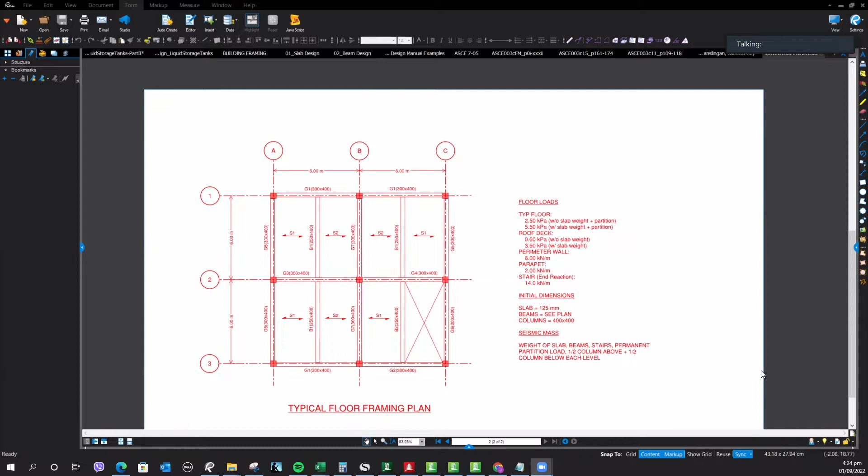Okay, so here we have the loads. I give you the load kani elevations, no? So 3.5 ang second floor, third floor 6.5, roof deck is 9.5. So ang footing is below 1 meter from the ground. Unya mao ni siya ang structure, no?

So floor plan. Kani siya class I expect a design of slab and beams lang sa for the September 15, kana sa ang pre-mid ninyo. I will announce it class when I will require this, but within September kaning design of slabs or design of beams akong i-require ninyo an Excel file, an Excel sheet.

So how will you do it? Okay, so naa diri tanan class ang typical floor weights. So 2.5 kilopascals kaning 5.5, please disregard this class kaning with slab weight kay ipa-compute na ko ninyo sa inyong Excel, no, ang slab weight, ang actual slab weight. So ayaw na ni ipil ang 5.5 hasta sa 3.6 roof deck, no? Perimeter wall parapet sa beam na ni siya, sa beam niya stairs.

Okay, so ang slab, this is the initial thickness, 125 millimeter. Depende kung mupasar sa design ninyo. So 125 millimeter start from there.

Kunya, beams, actually kaning mga dimension class, these are just assumptions, ha? Dili ni kung unsay na diri mausay inyong i-assume, ha? Kay it is possible nga kung abot na nig mga 8 meters, dili na nimo pasar kani nga member, or daghan kay kabilya. So that's why class,

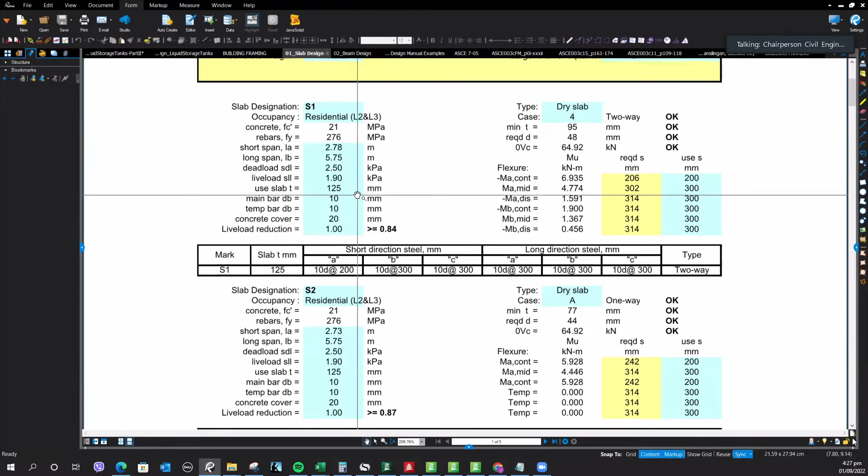Pero ako lang ipatanaw gihapon ninyo. Okay, so do you see my screen kaning slab? Kita ninyo class?

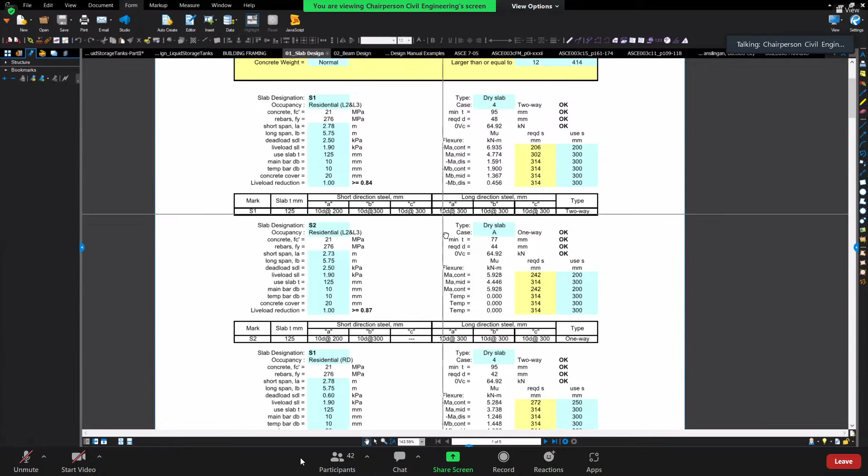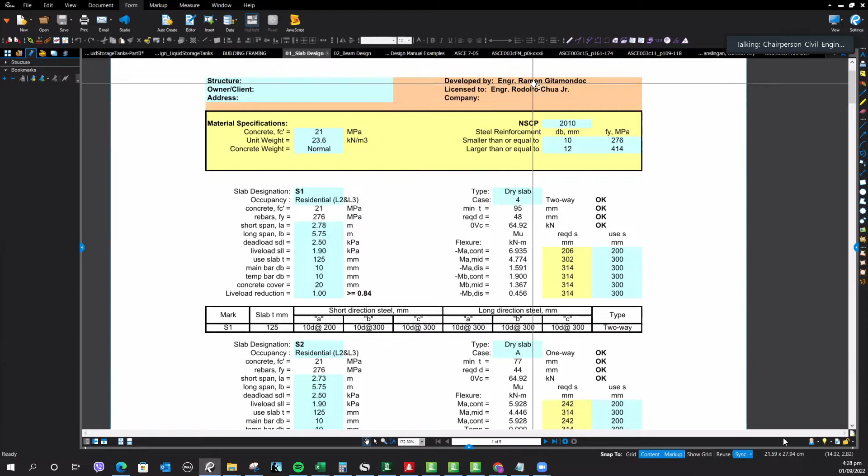Okay, slab. So this is the slab design. This is developed by engineer Gitamondoc, no? And then we have bought this from him.

Okay, and this is, it's just an Excel file class, no? We have done this in our undergrad sa una under Jerry Maratas, engineer Jerry Maratas, and it is also an Excel program pero dili in ani kanang unsa ni ka shortened, no? Medyo taas-taas to siya. It's okay class in whatever way you can do in Excel. It's okay with me. Pwede ninyo ipakita ang equation or unsa pa diha, basta it's an Excel file and it's user friendly ha, na masabtan.

I don't require you to follow this exactly kay naa naman yung mga programming embedded class, unya basin maglisod mo to make this ba. You can show how to compute the raw, or all the parameters ba in tabulated form. That's okay with me, no? For as long as you will arrive with the correct number, ha? So here class,

Excel file ni siya. So naa diri ang sa taas ang material specifications, ang FC prime, weight of concrete, unya unsa nga NSCP ang code gigamit, 2010, now is 2015, and then we also have the diameter is 10 and then 12 for the larger, is for sa kuan ni siya sa slab no 276, unya greater than 10 is for ang FY. Unya diri class ano man ni, na may two-way, no, nani two-way ug one-way.

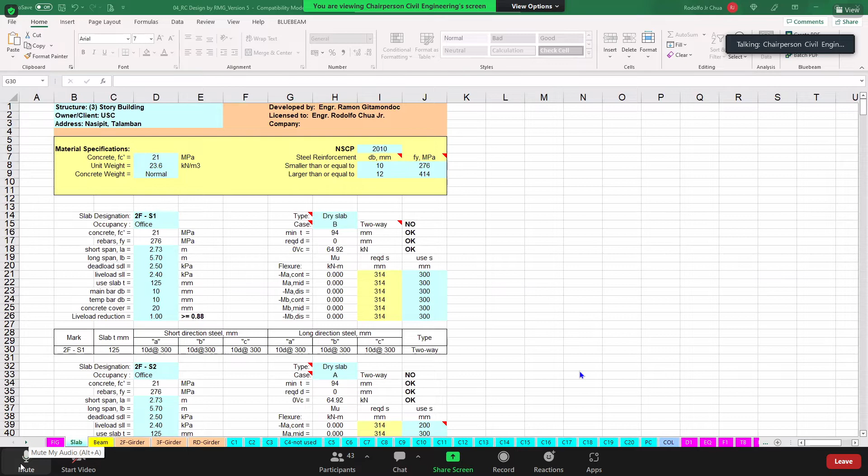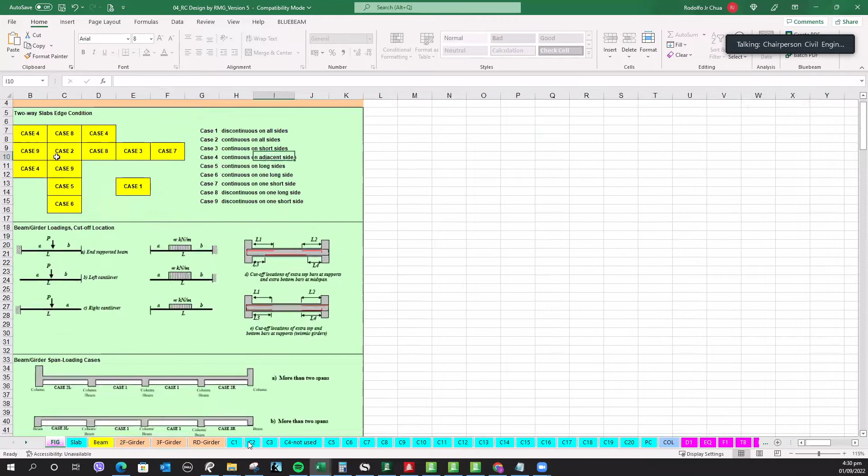So you see here, this is the figure class for the one-way and two-way slabs. This is so the user knows what case 4 means when they input case 4, referring to how the slab is continuous. So this can predict the long span, one end continuous, the other end discontinuous, and the short span, one end continuous, one end discontinuous. So which one applies to S1 if you look at the building frame - this is class for S1.

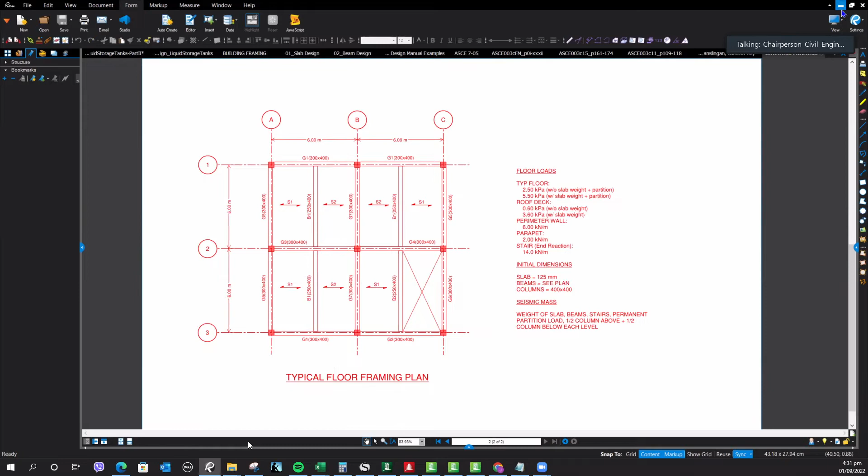Okay? In design, class, you have to look at the framing first - what members you can group together. That's why I put in the grouping for you earlier, so you don't have to think about it again.

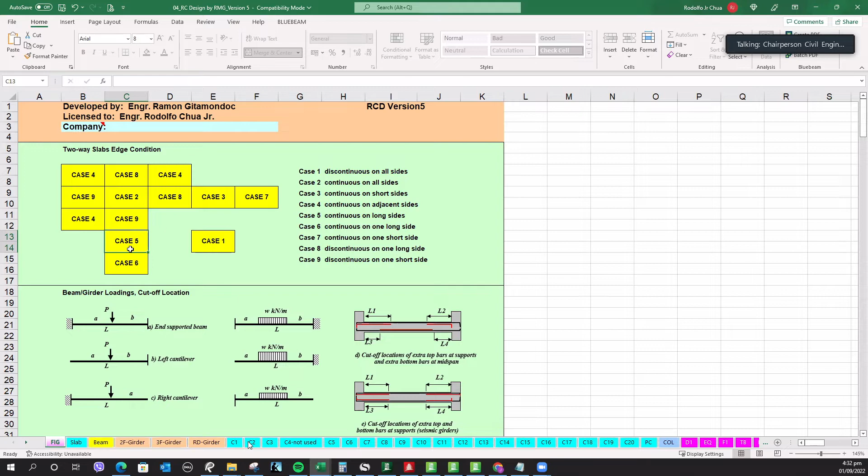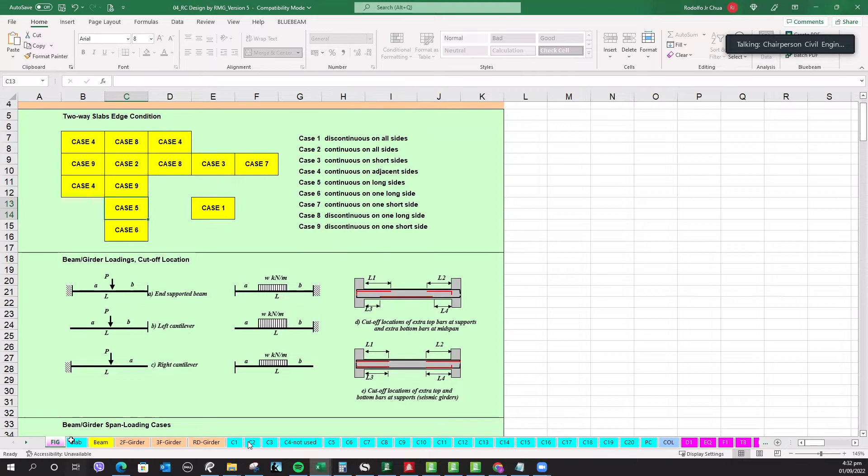And then for the one-way slab - it's here for the one-way slab. Okay, so all of these are two-way. Both S1 and S2 are two-way, so there's no one-way.

So here's the input for the short span - the clear span of the slab, minus the beam width. Dead load is 2.5, live load is 1.9, slab thickness 125, main bar diameter 10, temperature bar diameter 10, cover is 20. This live load reduction is in our NSCP, but conservatively we just assign 1 here.

And then you compute the moments for each long span and short span. So on the continuous side and discontinuous side, there are moments there. And then I'll go back to this - sorry, this is the 9 moments here.

I'll upload this, class. And then we have the minimum thickness, okay, required depth of the slab, okay. And then phi Vc, and then compute moments at each point - at mid-span, discontinuous side, continuous side. MA is for the short span length, MB is for the long span length. So the required spacing, of course, round down to hundreds, divisible by hundreds.

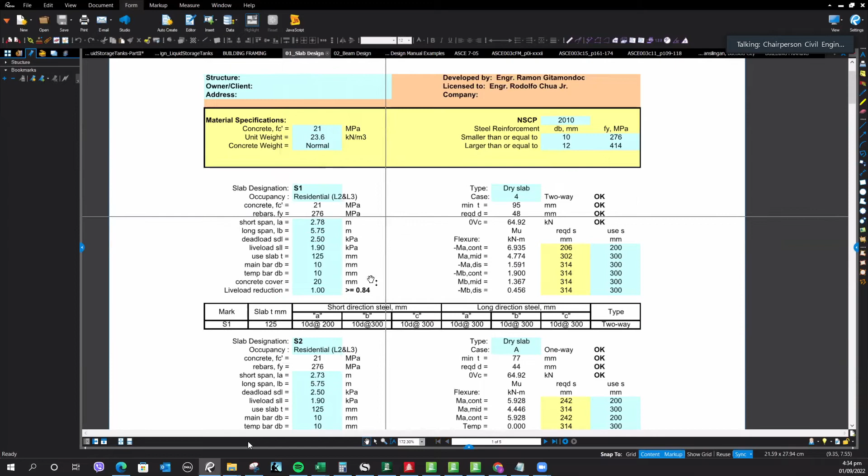And then you'll give this to me. By the way, your span lengths are all different. I'll upload it in Canvas, and then you find your name - each of you will have your own span length. So that's where yours will differ, your design will differ there, so not all of you will be the same.

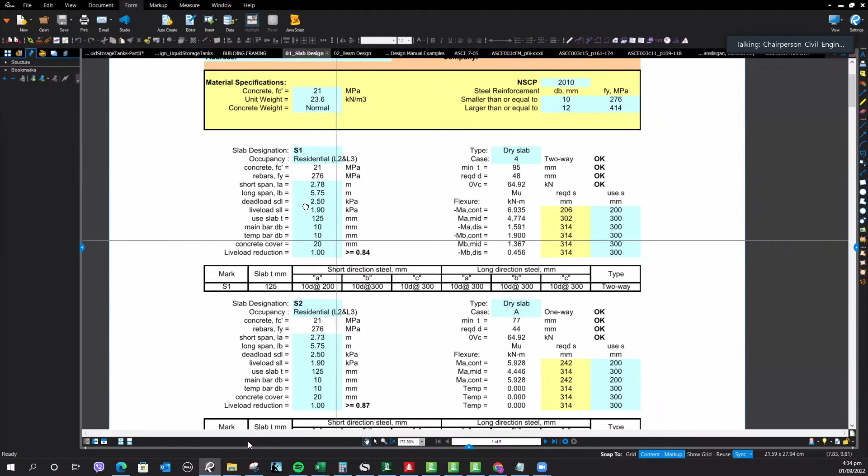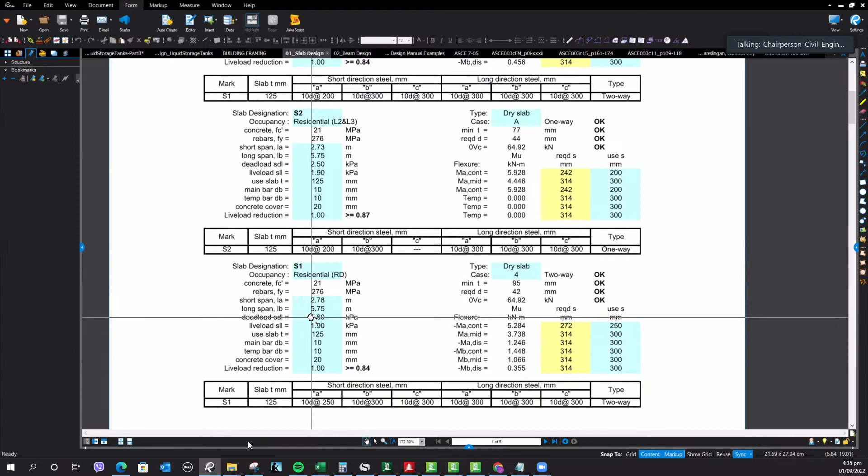Okay, so there's S1 and then S2 and then the roof deck. Level 2 and level 3 are typically the same, class. This is the roof deck - it has a different dead load, class, 0.6 kilo. The roof deck is smaller since there are usually no occupants there.

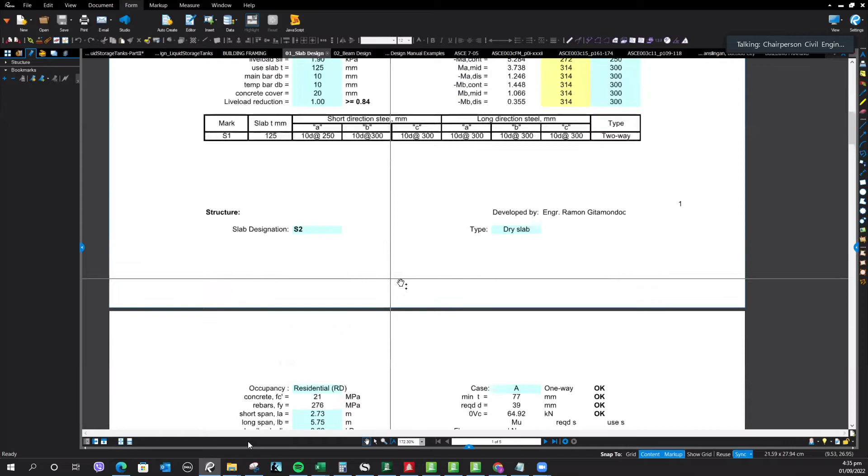Okay, so this is what I'll expect you to give me - the design of this. And then on the last page here, you'll see this table, class. These are the loads transmitted to the beams, meaning it's just WL over 2, the reactions from your slab.

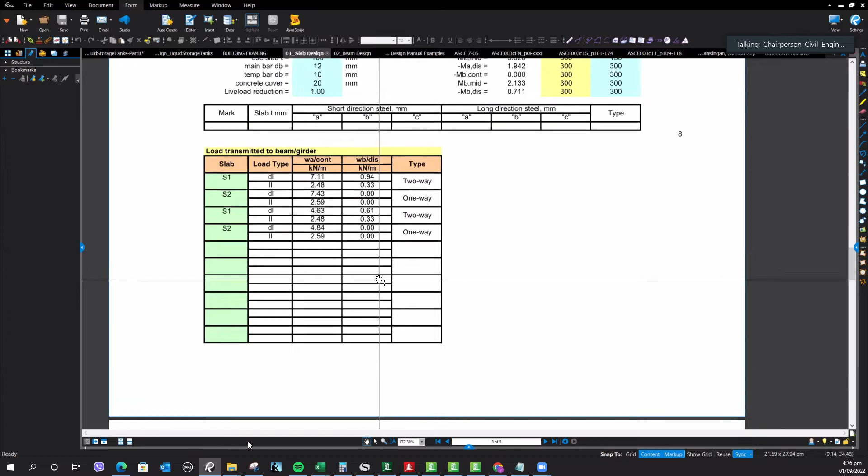If you look at the building frame, here it is - so its reactions on the short span go to B1, and reactions on the long span go to G1 or G3. That's why here all the dead and live loads are separated, since they have different factors to apply. So that's the table you'll also need to have, since these are loads to transmit to the beams. Okay?

And then down here to the beams now - you already have the step-by-step procedure to design beams. So you can also put it in Excel, this one. So we have different cases for the moments of the beams. I'll go to the Excel.

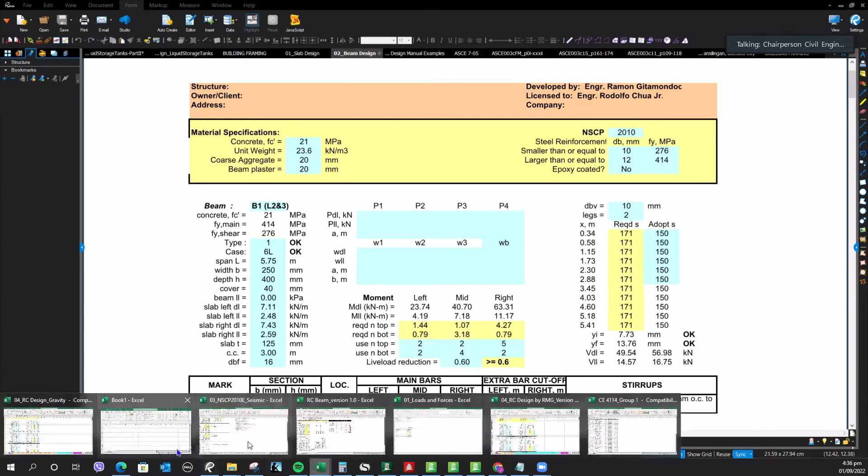Class, Excel is very powerful, no? So if you have free time, you can make so many programs from Excel. For example, design of retaining wall, design of structures, any structures, you can put into Excel. And it's very useful, hopefully you'll use this in the future.

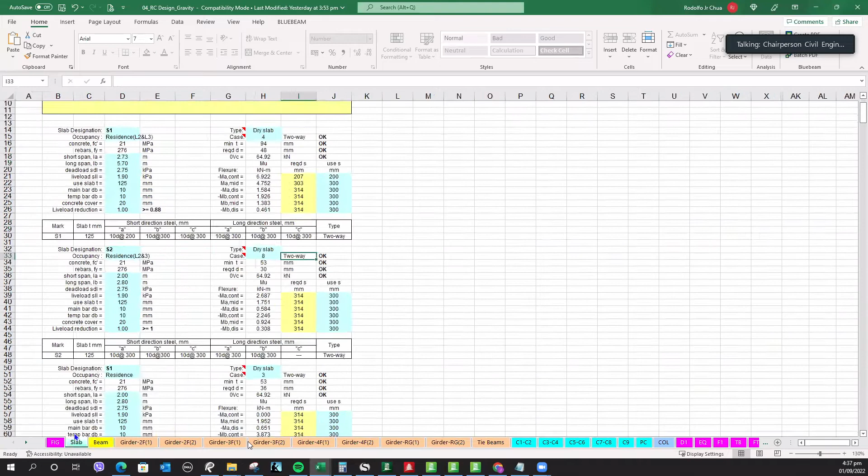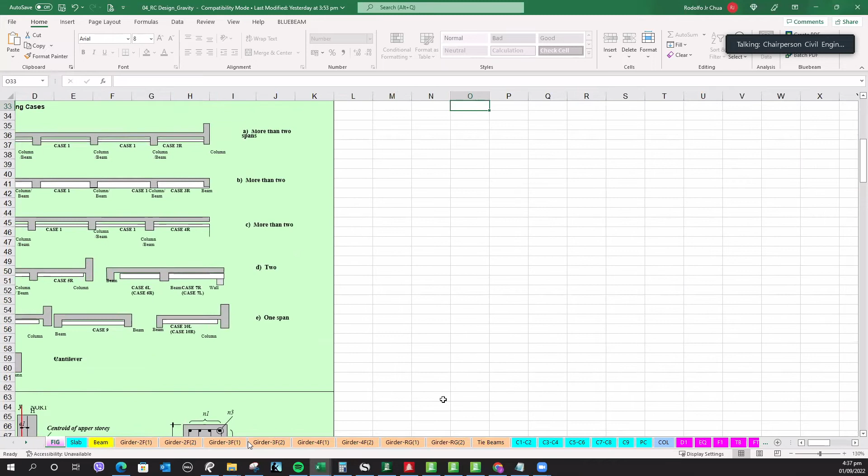So this is interior or exterior, or edge beam, whatever the case. If you will see here the figure, class, they have different moments, no? For case 2L, case 1, you already have this — this was introduced to you in your lecture. So there it differs, the moments, depending on what case it is.

Okay, beams pa man lang ni, class. And then the span length, clear span, assumed width, assumed height, the cover, the live load of the beam. This is where you put the loads coming from the slab — slab from the left side dead load, and slab from the right side.

Live load from the left slab, dead load from the right slab, and live load from the right slab. Then assumed thickness of the slab to compute the slab weight, and center to center distance from the beam and the diameter of the bar. So these give you the moments, dead load and live load.

There is another way to design the stirrups. We also need the reaction of your beam, class.

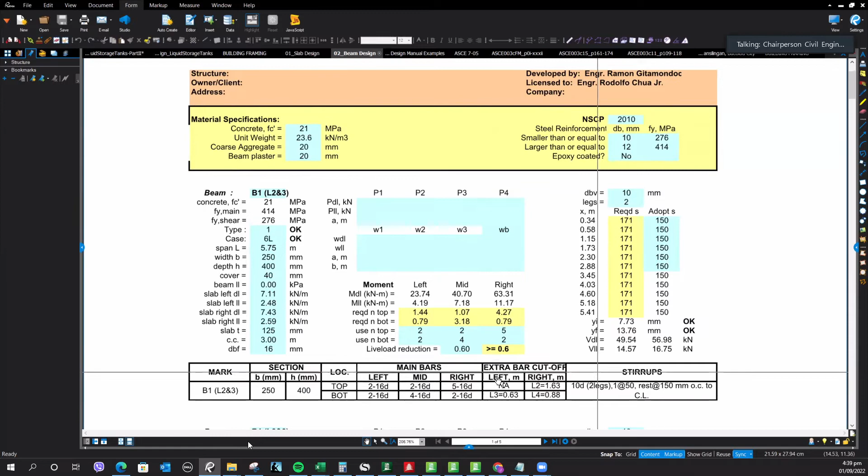So we will consider that in the design of the girders. And then the last thing to show in your Excel, class, is how many bars at top, left, midspan, right, and the extra bar cut off based on NSCP, and how many stirrups — 10mm diameter, 2 legs, 1 at 50, then rest at 150 millimeters on center to center spacing.

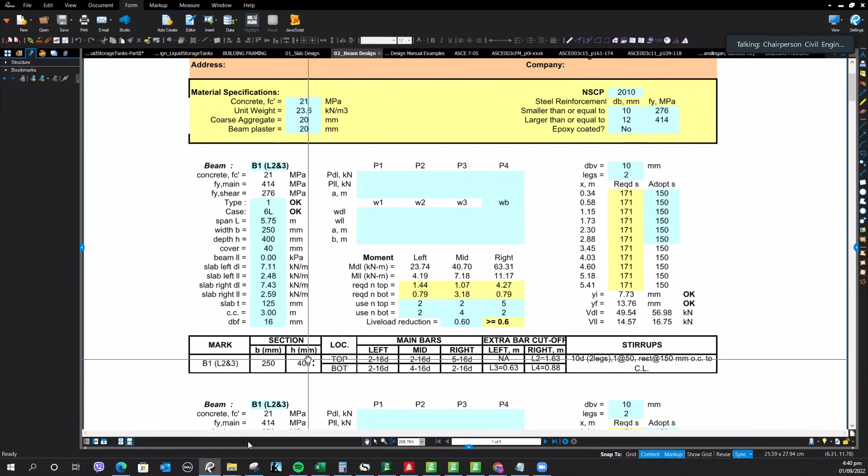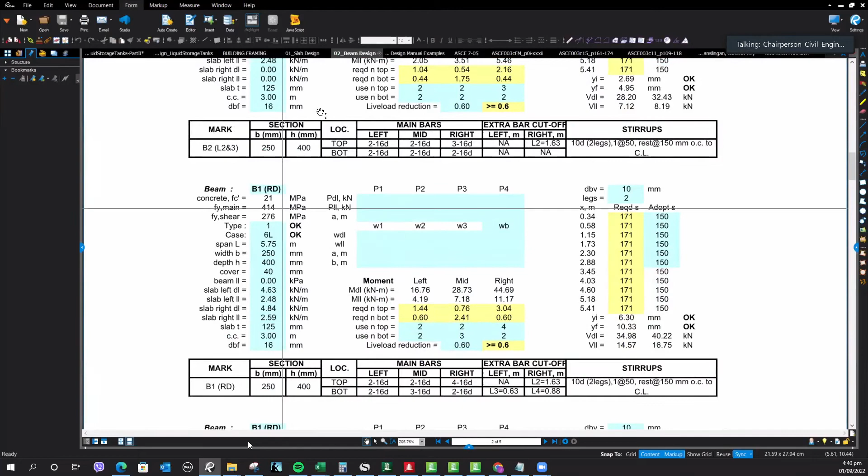So these are the sections, 250 by 400. Okay, so that's B1. Level 2, level 3, the same. And then the roof deck. Okay? So on the roof deck, there's B2. This is B2.

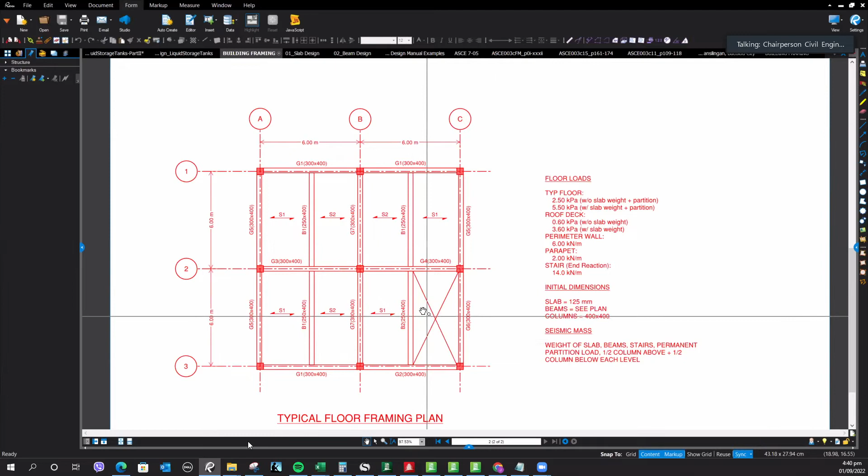This one is open here, class, this X — it's a hole, there's no slab here. That's an open hole for the stairs. Okay, so I have already modeled this, class.

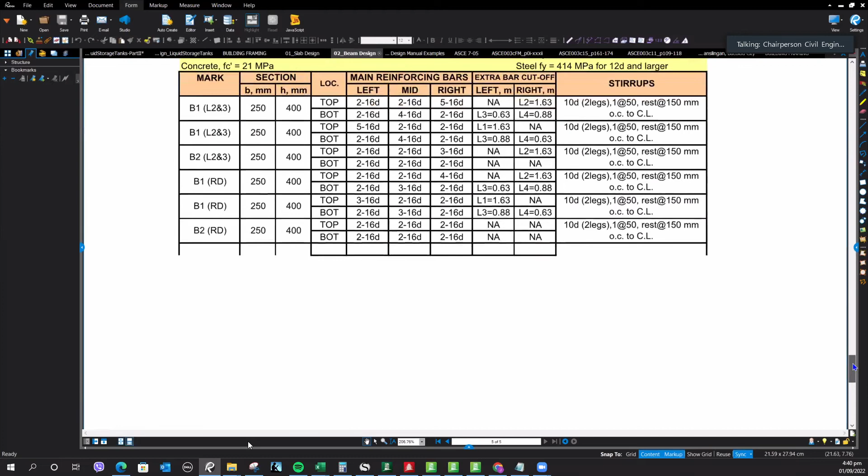Do you have questions, class, before I proceed?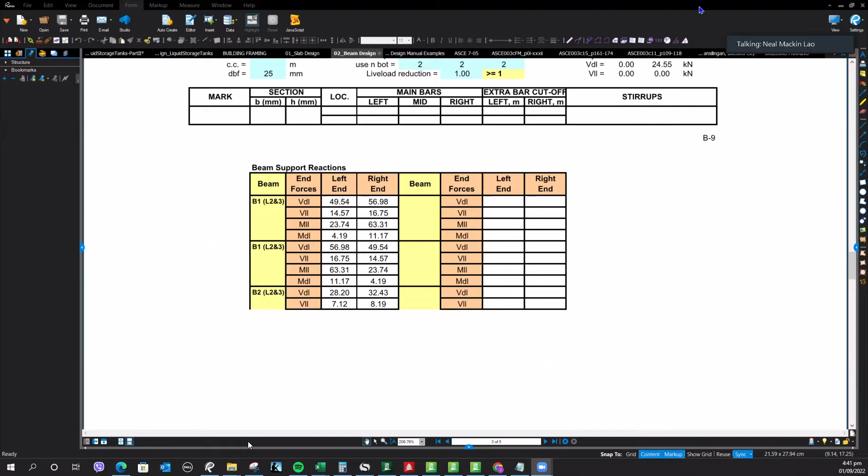Excuse me, Miss — for certain parameters such as spacing and slab thickness, is there an increment you would recommend? For spacing, like a while ago you said the spacing of bars is usually increments of 100, while some are increments of 25. So what can we use as a general guide on this?

Will we use increments of like 25mm for spacing, thickness of slab, and dimensions of beams? Usually it's 50 millimeter for beams, or columns — I have not encountered beams with 25mm increments. Very rare, because 1 inch is already good. So it's usually 50s or 100s for their increments, but 25 will do.

25 millimeter is okay too, class, because that means you're very exact in your design — which, if it can save the client money, is very ideal at 25. But any dimension will do, as long as it passes and your design is economical, that's okay. So that's the condition to consider when you look at it.

Anyway, can I share with you my screen again, okay? I'll share with you my screen again, just to show you that this building is already modeled. Many of you should make models too, class. You see my screen, class? Can you see it?